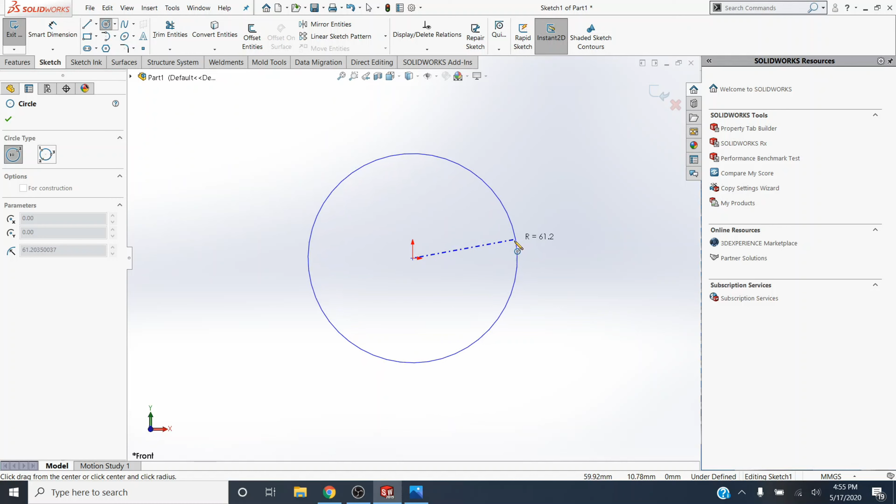We're going to start off with our part. Since it's a part, I'm gonna click on the front plane, normal to, then hit sketch, and draw a circle right from the origin. Click on the origin point, draw a circle. Make sure this is set to MMGS, okay. If it's IPS, please change it.

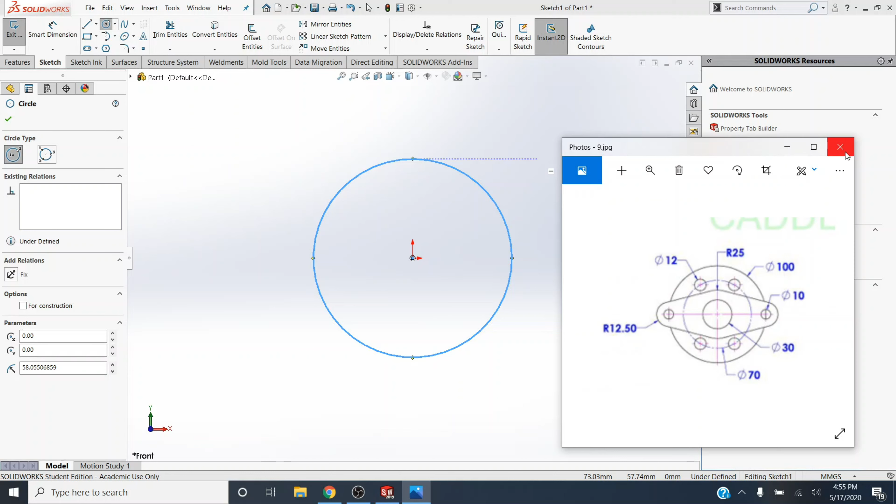Let me see how many circles do I need? 1, 2, 3, and 4. And the biggest circle is 100 diameter. Let me set the dimension up for this one. This one is 116, okay that should be 100.

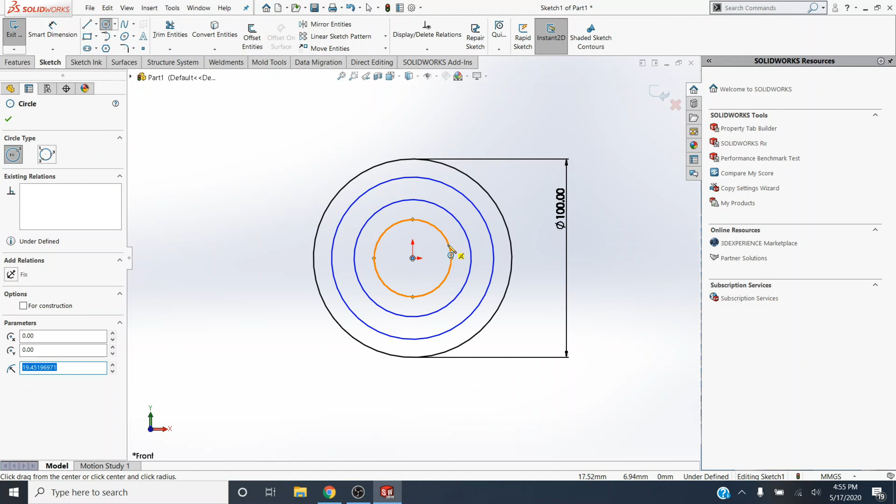Now let's draw another circle. And another circle. The next one gonna be... oh did I accidentally cut it out? Oh my god. Okay, so this circle, the inside circle, is gonna be 70 diameter.

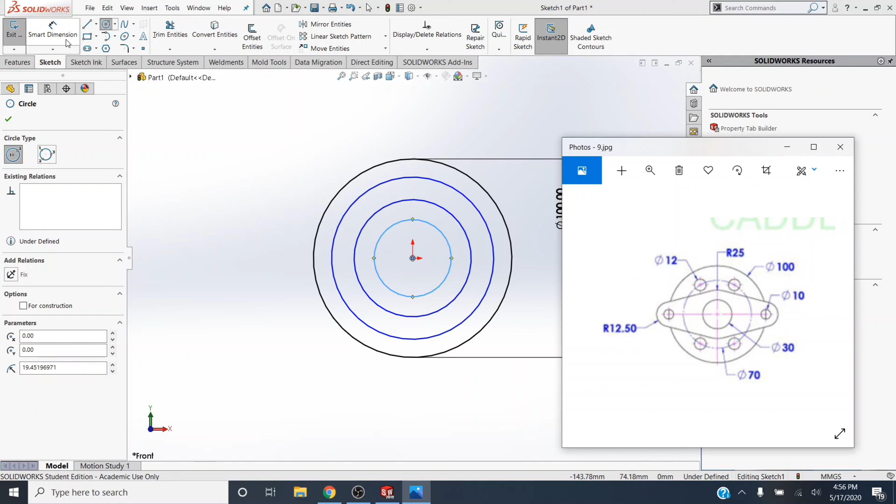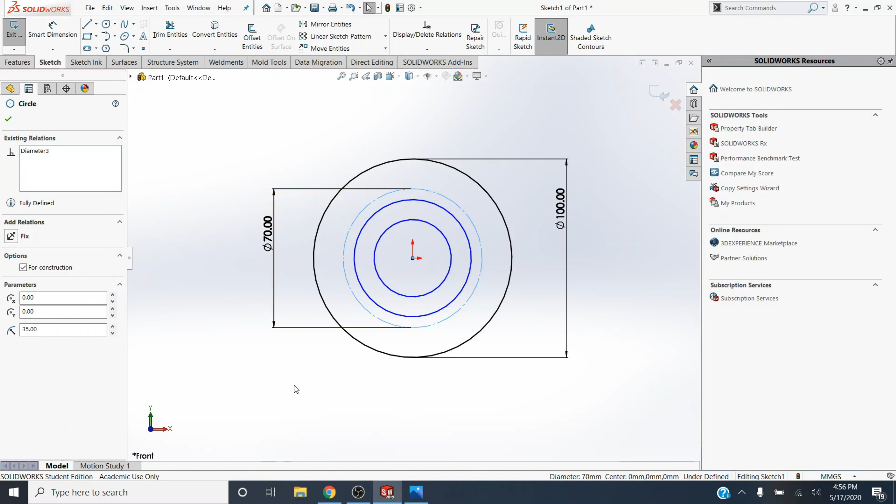And this circle is gonna be a construction circle. Click on the circle, since my circle is highlighted and selected, I'm gonna click on construction. Perfect. And my second circle gonna be 25 radius, this means 50 diameter.

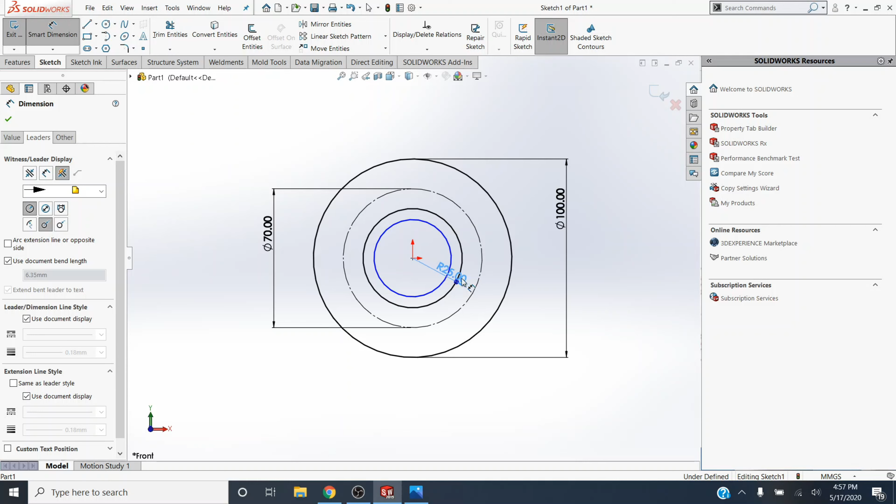Let me change the leaders to radius. And my inside circle gonna be 30 diameter. Okay, so I got everything.

Let me make the line thicker for this one. You know what, no, I need the dotted line. Perfect. Solid line is better now.

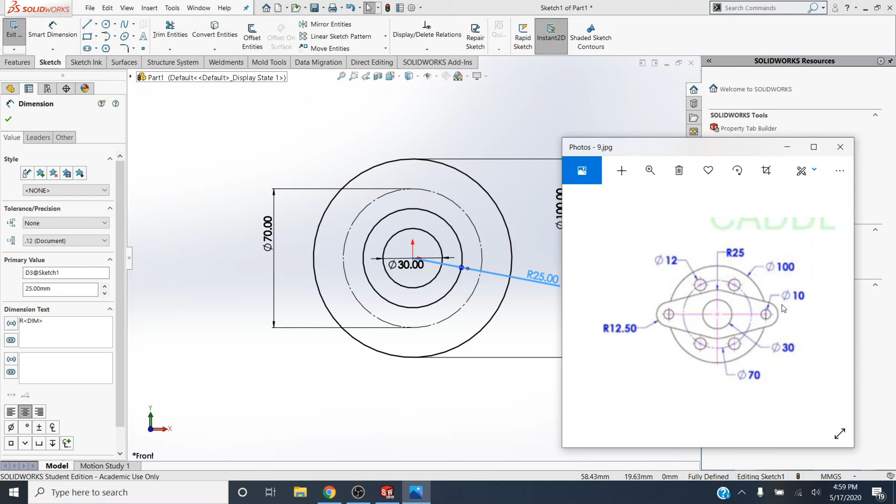Now it's time to draw these two circles, and these gonna be 10 diameter. Set the diameter to 10. Select this circle, and set them equal. Perfect.

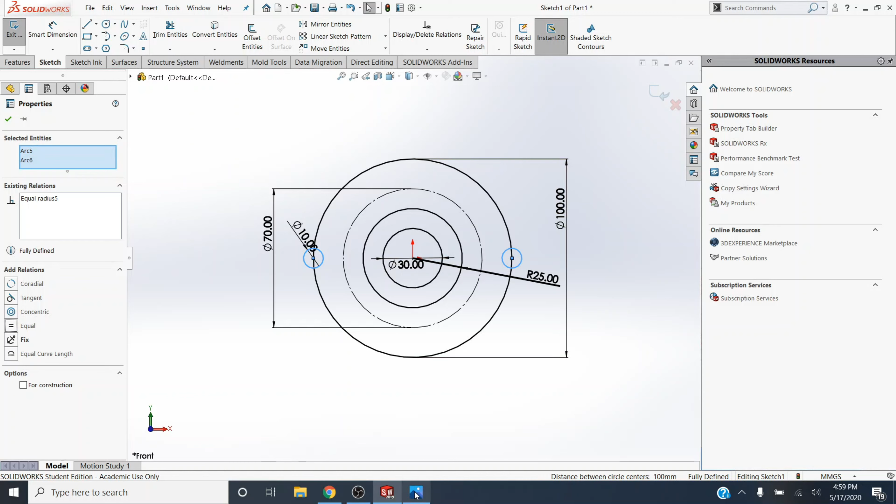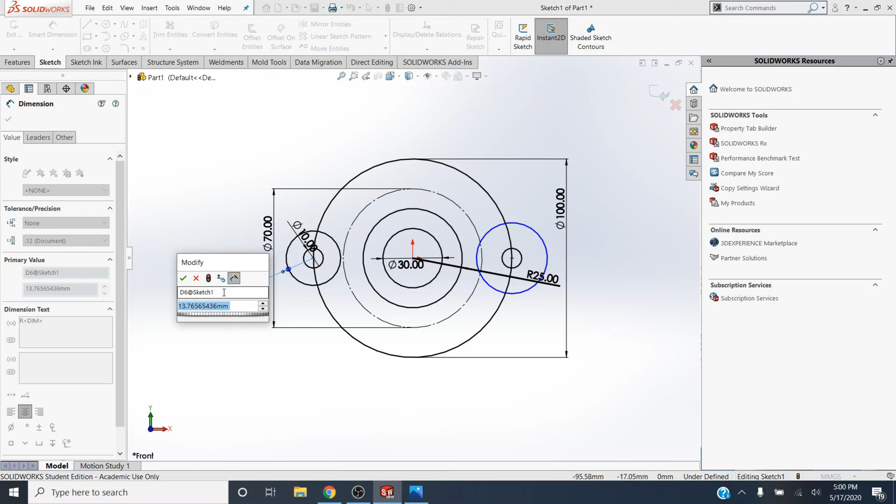Now this is gonna be radius of 12.50. Now we have to make another circle, using the same center point. And this is gonna be... change it from diameter to radius, and it's gonna be 12.5.

And I'm gonna select this circle, then I'm gonna select this circle. Uh-oh. Set them equal, okay.

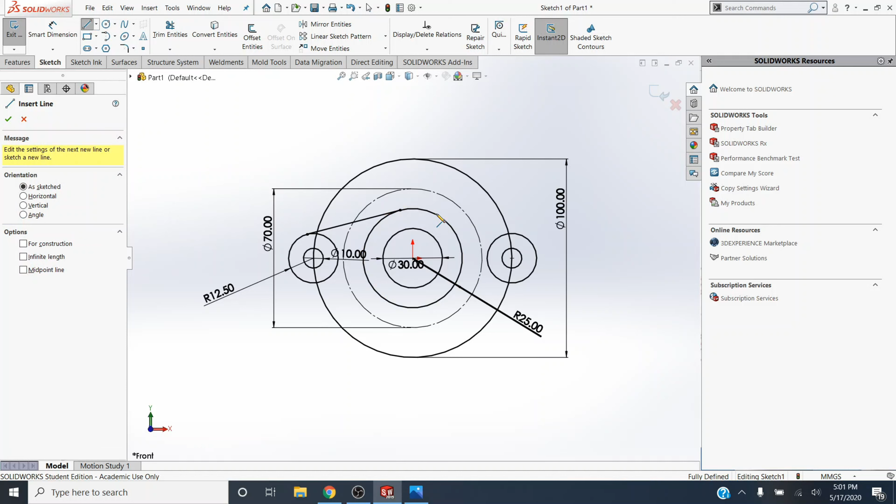Now what I'm gonna do, I'm gonna select the line. So I'm gonna click on this circle, and I'm gonna click on this circle, so automatically it's gonna be tangent. And I'm gonna repeat the process again, clicking on this circle and this circle, making the line tangent.

So I'm gonna repeat the same process again by clicking on the line, this circle to this circle, and click on the back of the line again, click again on the circle, and again on this circle. So as you can see, the lines are tangent now.

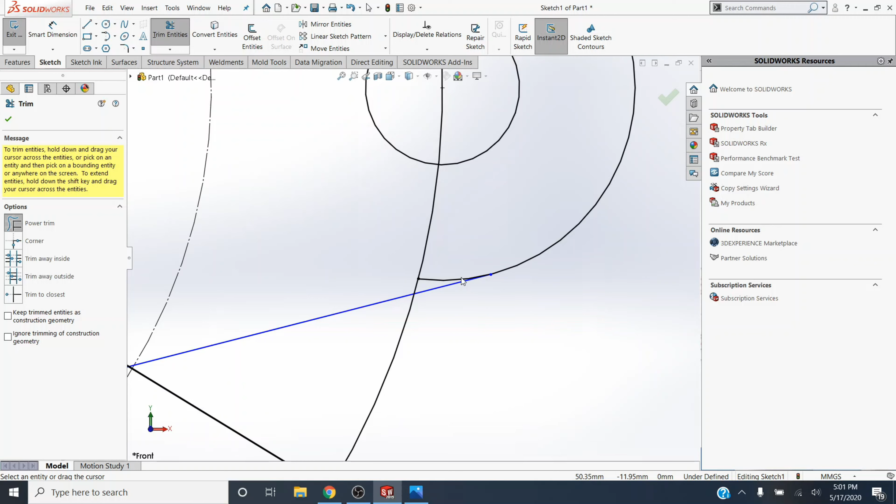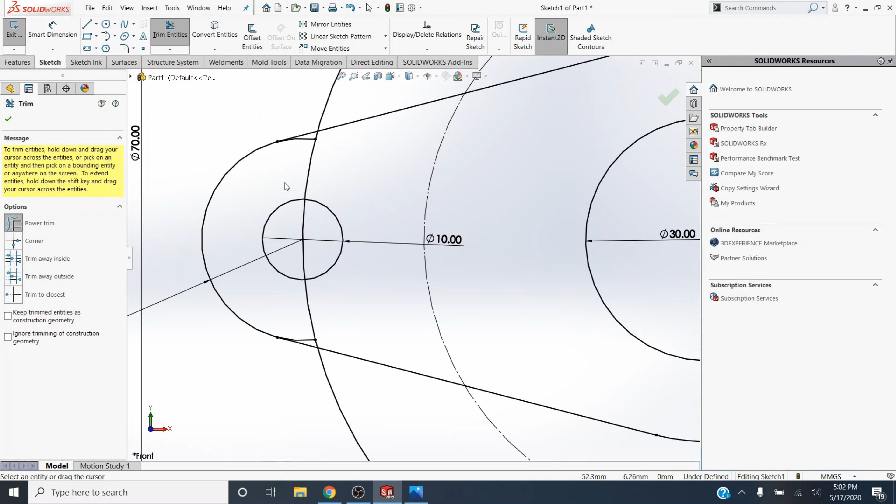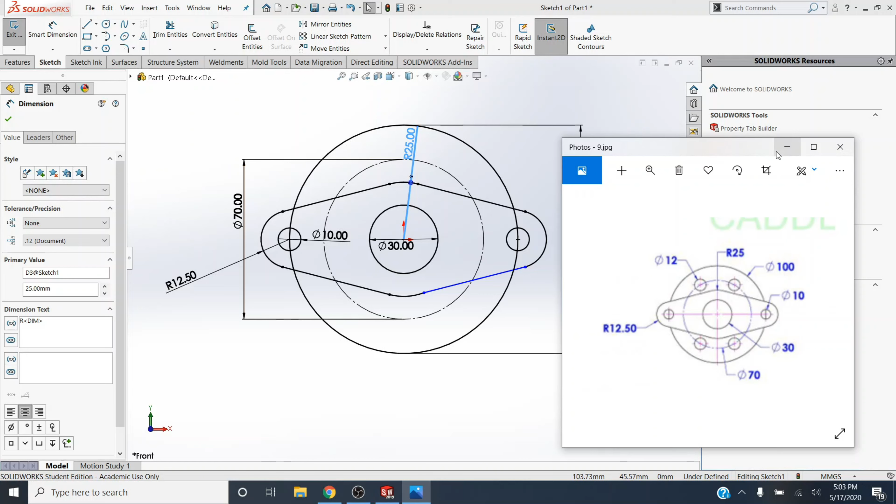Okay, this is the radius. Now I need to draw these four circles. And the best way to draw those is by using the pattern, the circular sketch pattern. So I'm going to draw a circle.

That's how I got my four circles. Looks pretty easy. Now I'm going to click OK, and I'm going to set the diameter for the circle. I actually forgot what was the diameter - diameter was 12, that's good.

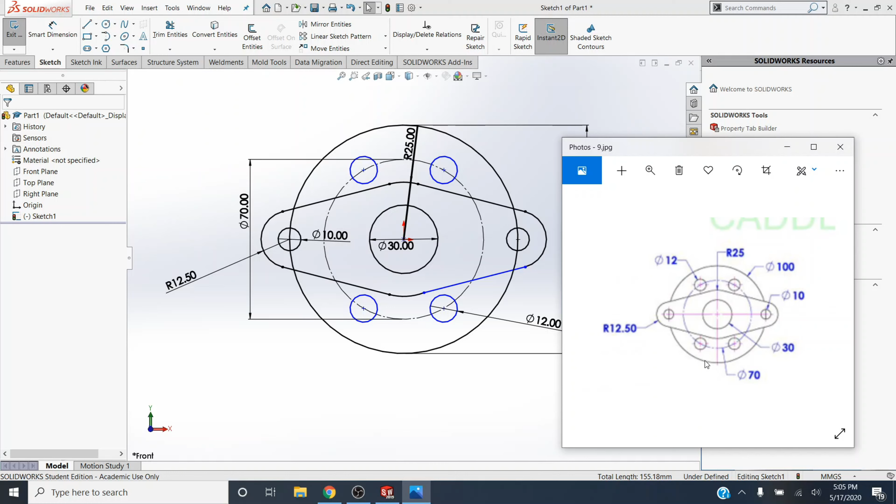And I'm going to set all these equal to this. So now all of these are 12, 12, 12. This is perfect. Got it, and we are basically done with the drawing. It looked pretty neat.